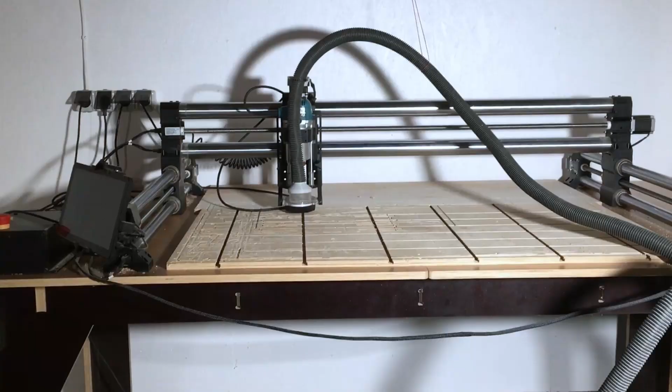So we are in a garage that we would like to turn into a nice woodworking workshop. All we have is a hobby CNC table, a router table that we built last week, and a small pile of plywood. We are making most of the necessary tools ourselves, and today we will build a workbench.

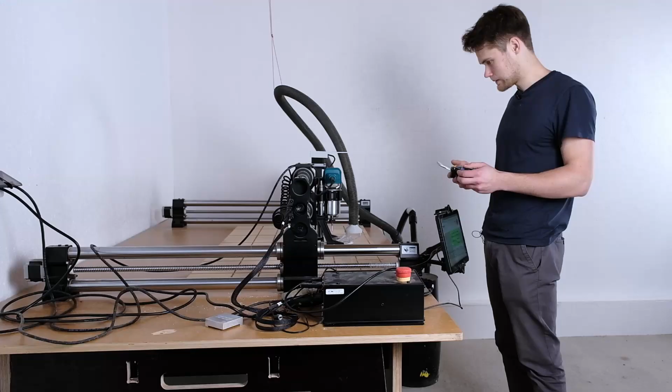Last week we started our workshop with nothing but a CNC table and a dream of having a functional woodworking workshop.

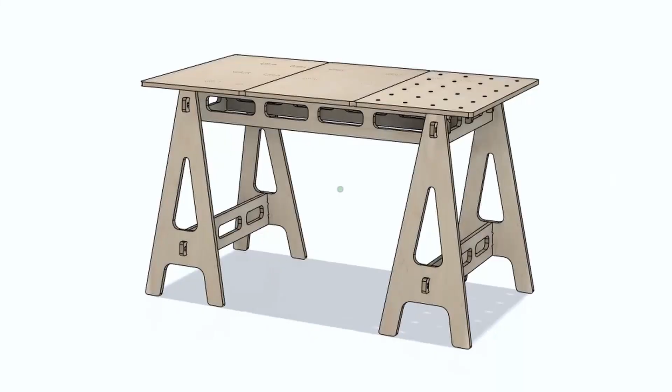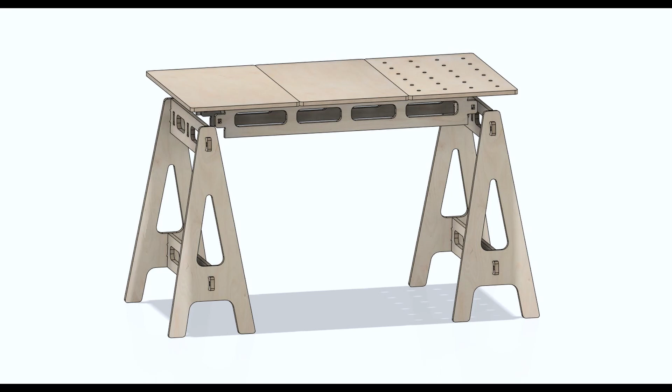So one evening I was designing a workbench option that we could make for this workshop. However, the next day I realized that the table that I came up with wasn't that different from the solution that we currently have. If we take it apart, you can easily identify two sawhorses and a tabletop. So this wasn't good enough, but then I thought to myself, maybe the sawhorses aren't such a bad idea. We are just looking at it from the wrong angle.

This was looking promising. To make it sturdier, I added side panels to the table and a frame for the bottom shelf. The concept was ready, I just had to design the components. While designing the table, I had to consider the sizes of material we have in our workshop. And component by component, the workbench came together nicely.

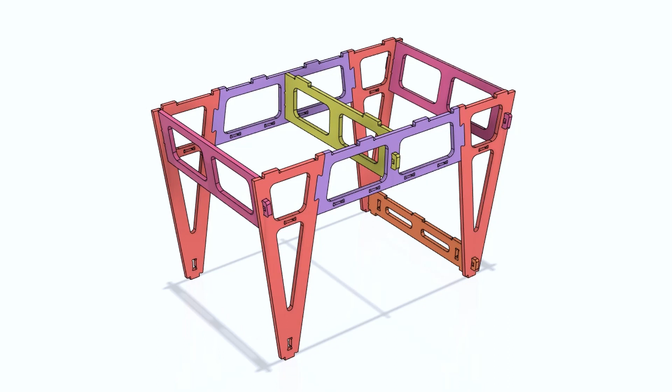For the frame we decided to use 18mm plywood sheets, and for the shelves we used 9mm plywood. To maximize the functionality of the table, I added dog holes to one tabletop panel. Then I added some dog holes on the bottom shelves as well. I will show you why later. The design was ready for CNC operations.

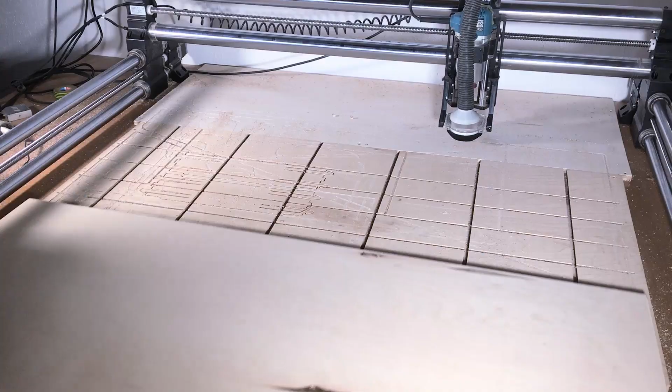I wish the CNC cutting was as simple as loading the plywood on the table and removing the finished components. However, during the CNC operations some things went wrong. First, I had an issue with the dust collection. When the CNC was cutting near the home position, the vacuum hose detached from the dust chute.

Earlier, I had changed the hose attachment point at the ceiling. I had to move it closer to the back wall since I had a GoPro right above the table. So the camera was in the way of the hose attachment string during the CNC operations. Because of the new attachment point, the vacuum hose couldn't stretch enough. Therefore, a couple of times it got detached from the CNC.

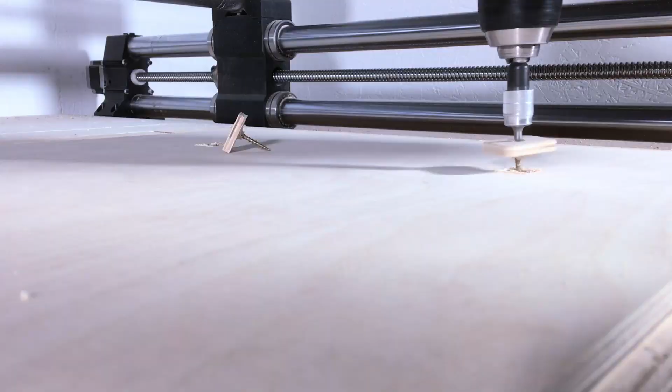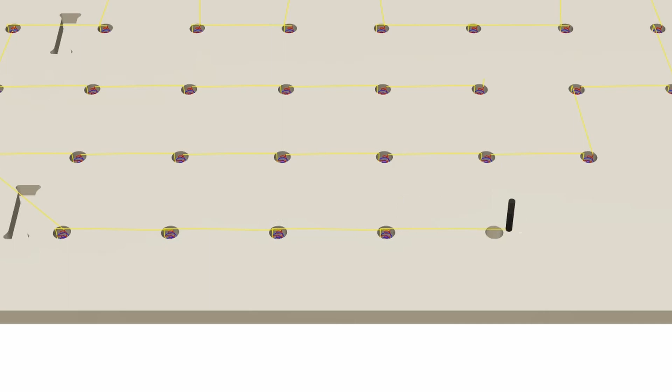And then I almost hit a hold down screw. I used small plywood offcuts to hold down components like tabletops and shelves. But as it turns out, the retract height I had set up was only 5mm. This meant that the router bit was traveling between the cuts only 5mm above the material. Thankfully, the screw was sticking out less than 5mm.

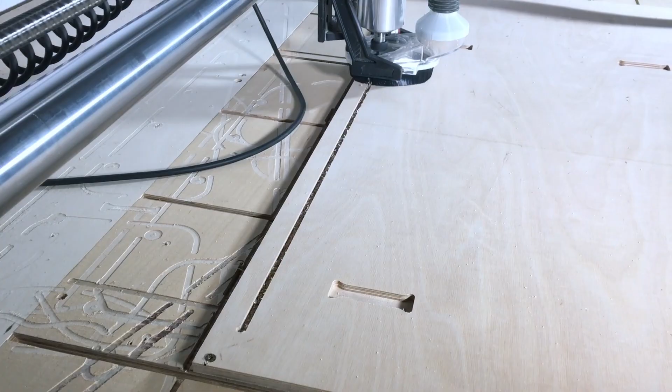The third mistake that I made was running the contour cut in the wrong direction when cutting some components. As you know, conventional milling ensures the best quality of the cut and you get smooth plywood edges. Unfortunately, for some operations, I forgot that I needed to change the cut direction in my software, therefore doing climb milling. The results were not as good as I wanted them to be.

Anyway, after the CNC operations, I had to remove the support tabs. I used the good old chisel and hammer method. After it was done, I used our router table with the flush trim bit to remove whatever was left of the support tabs.

Then, using the chamfer bit, I trimmed the component edges. While trimming, I had to be mindful which edges I wanted to chamfer and which should be left as they are. I didn't want to chamfer the joint edges. That would make the finished project less attractive. The only exception to this was the dovetail joints that we are using at the side of the table. A little chamfer will highlight it, and that will add a nice detail to the table.

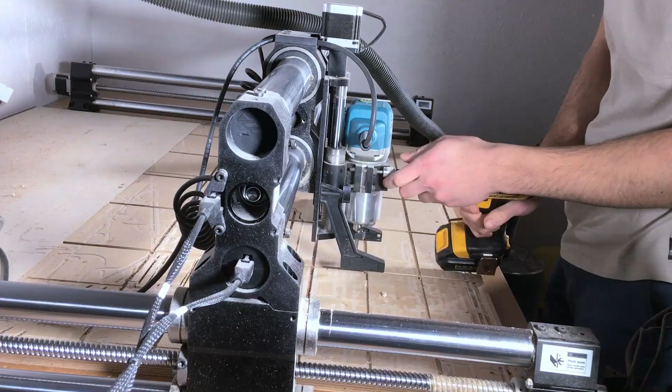Since we had a lot of dog holes that needed their edge trimmed, I decided to use the Makita router that we have on our CNC. It's quite simple to remove, it only takes loosening 3 or 4 screws and lowering the Z-axis. Once it was done, trimming the dog holes was quick.

And then it was time for the most satisfying task, assembling. The first thing that we assembled was the frame for the bottom shelf, and after installing 4 wedges, we put it at the side for later.

The second task was to assemble the table sides. Since we used the dovetail joints, this made me anxious. My biggest worry was how well the components would go together. For joints like these, even the slightest contour offset could end up in disappointment. But it turned out perfect. Just look at this. If this doesn't make you smile, I don't know what will. Alright, back to the assembling.

Next, I added the shelf covers. Then it was time to install the shelf panels. The panels at the side add structure to the table and ensure that the dovetail joints don't come apart. After that, I had to install the bottom shelf frame we assembled earlier. Finally, it was time to add the other side of the table.

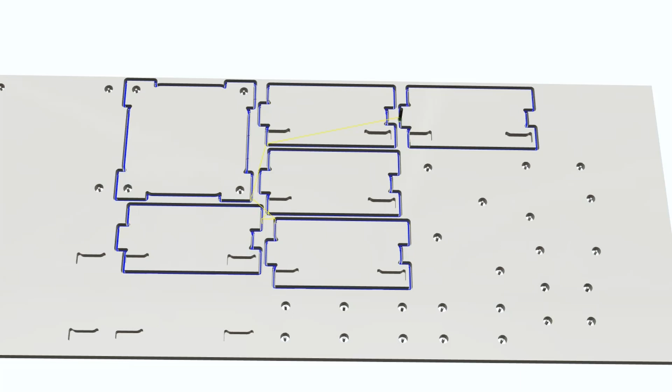My only regret is when cutting the attachments, I accidentally used the climb milling approach, and the result isn't as good as it could be. But I will remake the components at some point, most likely before applying the finish to the table. And one more thing about the finish.